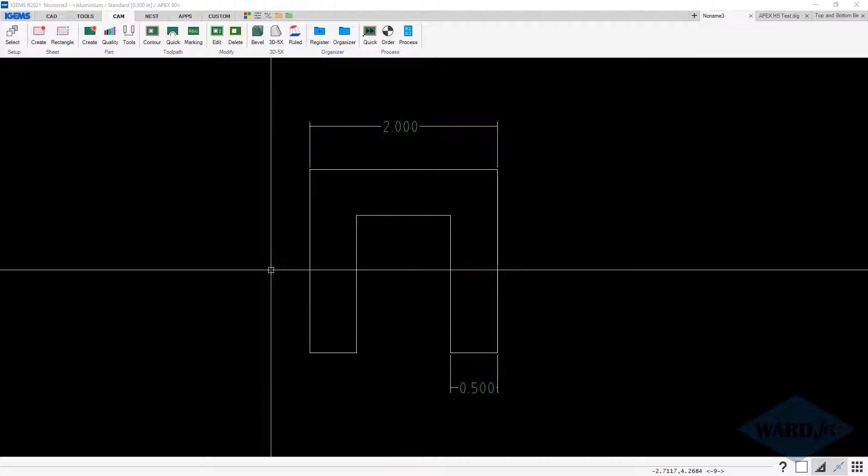In this video, I'll run through how to set up and use taper angle control and variable offset control in IGEMS 2021. Taper angle control can only be used if you have our Apex 60 5-axis head. The variable offset control can be used both with the Apex 60 head as well as 2D heads, since there's no moving of any A and C axes involved with the variable offset control.

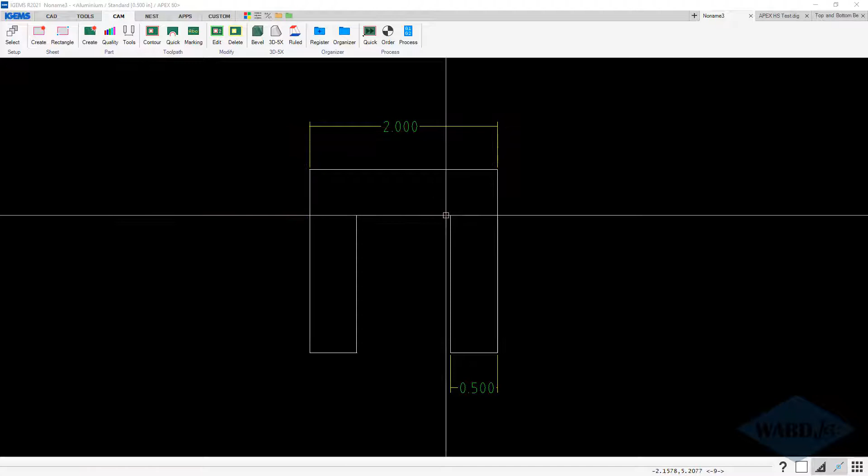The taper angle control helps to reduce the taper top to bottom on a part when you do waterjet cutting at different speeds. And then the variable offset control changes the tool offset as your speed changes. So once we create a toolpath around this part here, you'll see that when we're at a slow area and then as the speed increases, the offset will change.

And that's because as you cut slower with waterjet, your kerf width gets a little bit wider, and conversely, as you cut faster, it gets slightly narrower. And with the variable offset control, you're able to basically adjust or compensate for a bit of that change in your tool radius as you're cutting along there.

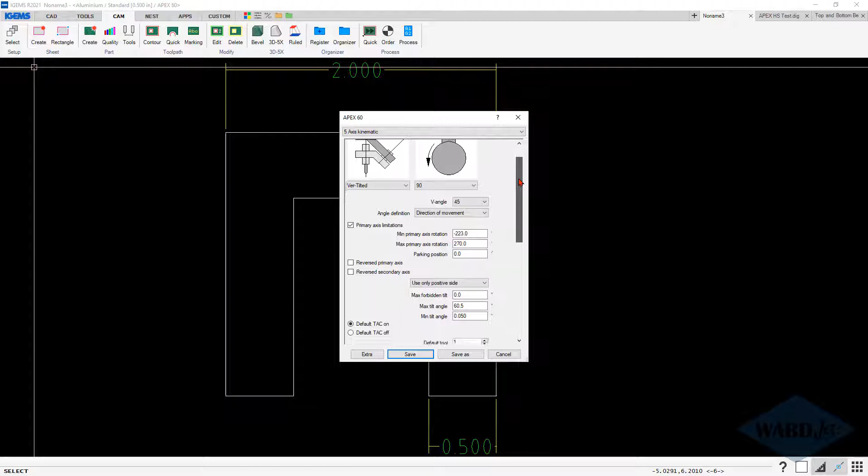So first of all, for the Apex 60 machine settings, if you click on the machine icon and you go down to the 5-axis kinematic area, if taper angle control is something that you're going to want to use all the time, which once you have the numbers in the material you might as well, you can come down about halfway and click this button here, default TAC on, and then the taper angle control can be applied to every part that you program.

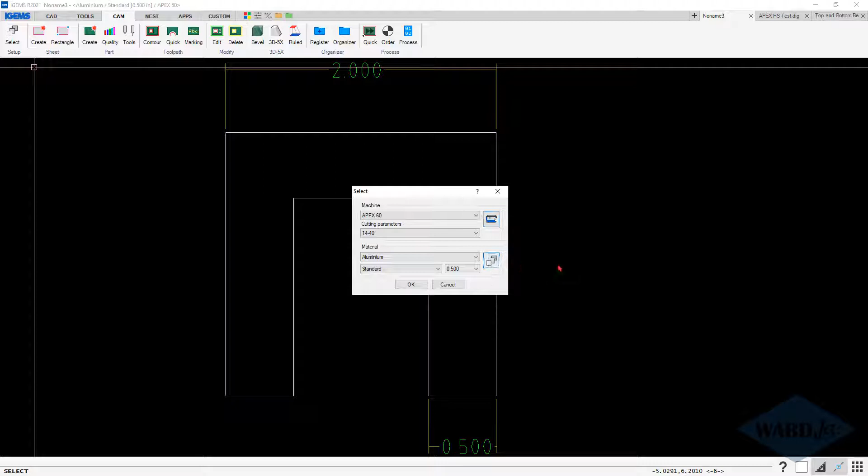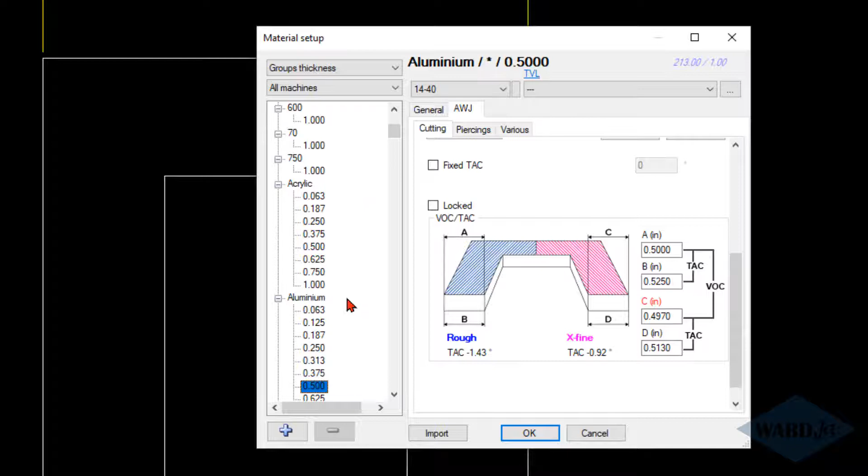And then we're going to look in this case at 1/2-inch aluminum. So here we can click on the edit material button. And you scroll down here a bit, you've got this box here for VOC, TAC. So we do have some numbers in here for many of the metals already, aluminum, stainless, mild steel, a few others. But if you've got a new thickness or material that's not already in the database, the basic idea would be to program a shape like they've got here.

And in the background, I've got one that's programmed basically 2 inches by 2 inches with 1/2-inch fingers. And you cut the left half at the rough speed, and you cut the right half at the extra fine speed, and then you take measurements A, B, C, and D.

So B minus A will give you the taper angle control number for the rough speed, and then D minus C is going to give us our taper angle control for extra fine speed, and between those two the numbers are interpolated. And then the other thing is the VOC, and basically what they'll do is subtract C from A. And so in this example here we had 1/2-inch at the top of the rough area, and we measured .497 at the top of the extra fine area.

So that's generally what you're going to see, 2, 3, maybe 4 thou difference between the two. Generally it's going to be probably 2 to 3. And then for the taper angle control, generally at the rough speed you're probably around 25 thou taper. At the extra fine speed you're probably somewhere around 15 or so. So if you're just thumb sucking some numbers and want to plug some things in, these would probably be a fairly decent starting point for the general range of 1/4 inch through 2 inch.

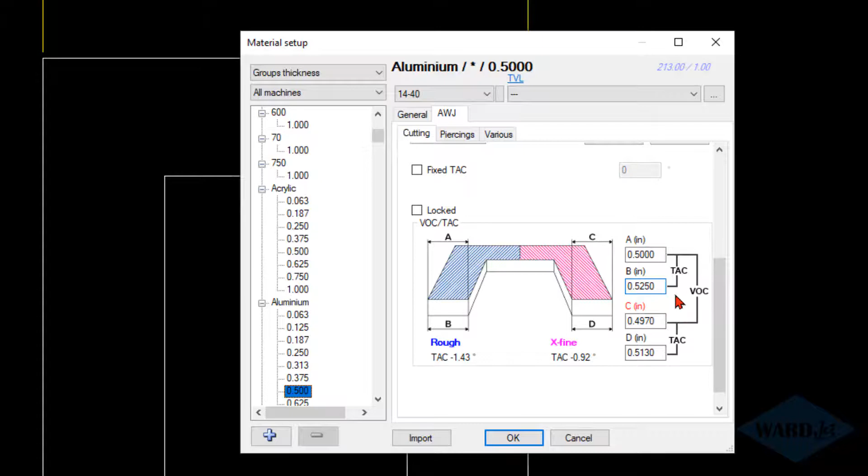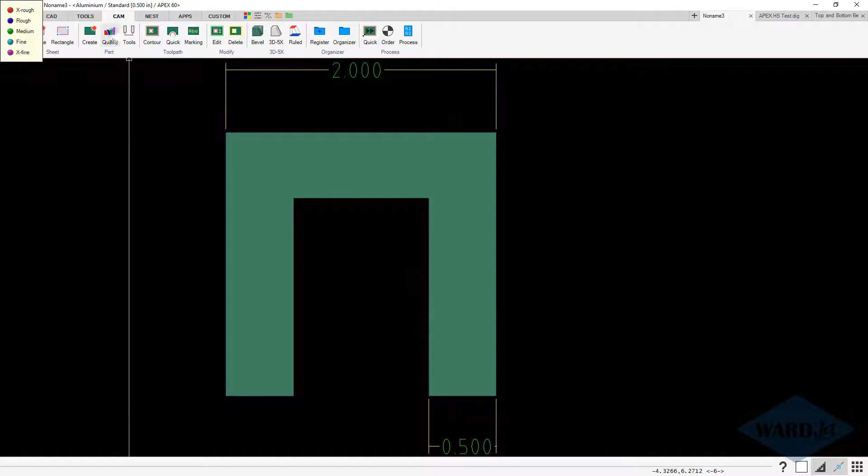Now what we'll do is go ahead and apply this. So I'll go ahead and create my part. And I won't create my toolpath right now. I'll go into my quality area and apply quality. So I'll do the rough, I'll generally start somewhere over here to the midpoint of here. And then I'll do the extra fine, we'll just go from here to here.

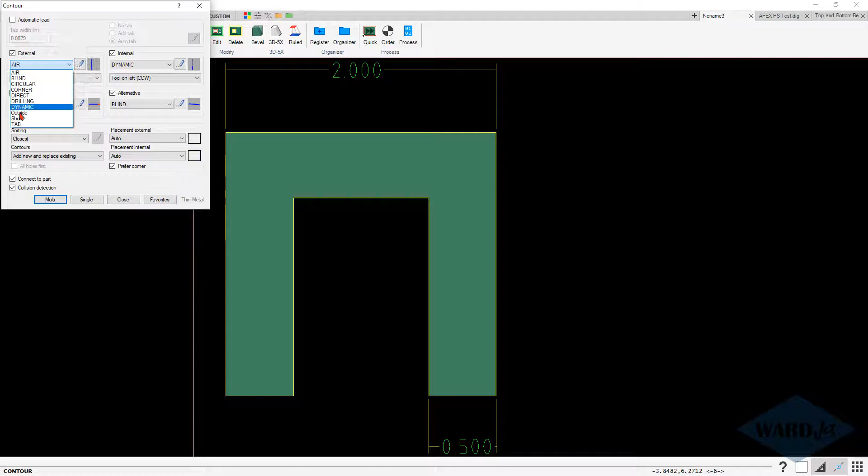And I'll put a toolpath on here. Let's switch to my metal. Usually you're going to want to have a tab on the outside so this doesn't fall into the tank. So we'll put that at the top middle here. And then I'll hit enter. So if I click on the quality, I've got my qualities on there.

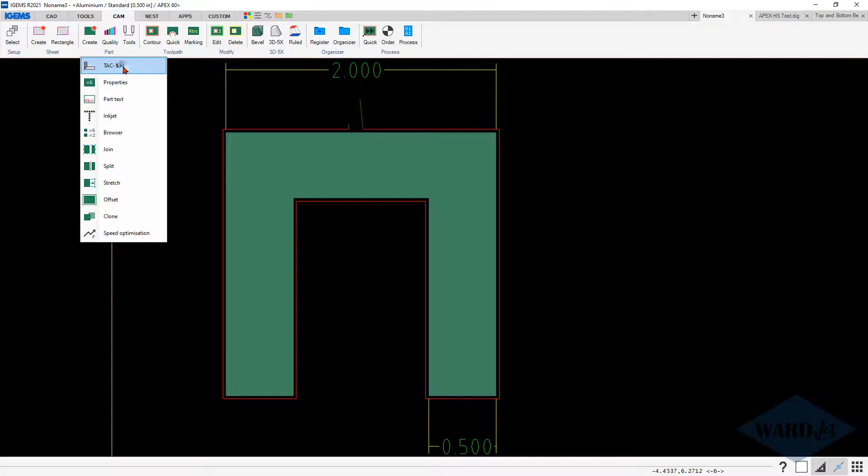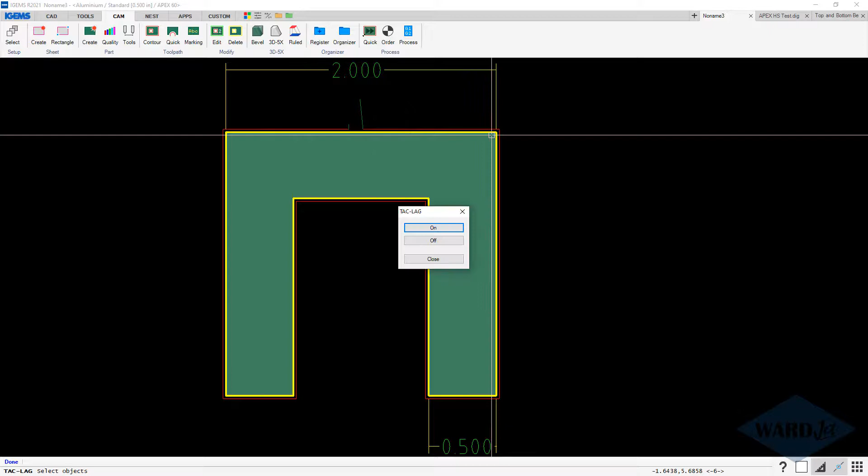And just as a side note, if you go into part and the TAC-LAG button here, since this is highlighted in yellow, that shows that the taper angle control will be applied to this. If you decide after you've applied the taper angle control you don't want it, you can just click on here and remove it, or if you want to put it on an older part that you hadn't applied it to, you can just click on there and turn it on. So then we'll just set our 0,0 point on here and create our file.

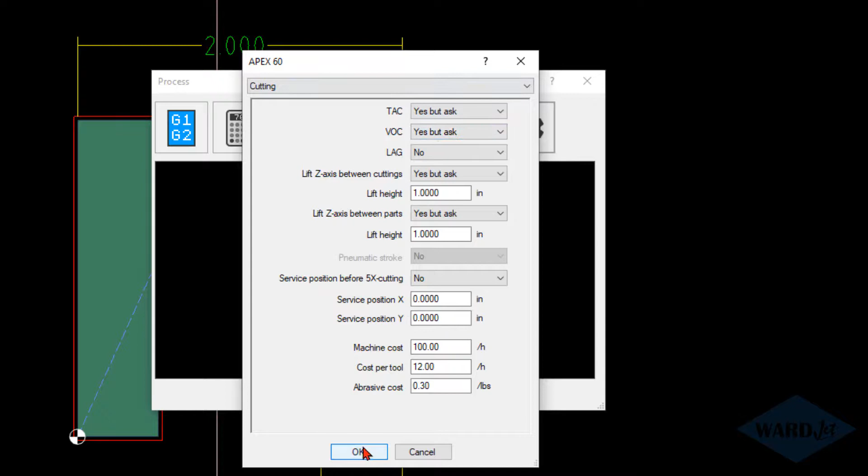If you go into the settings area and strategy and then go to the cutting area, you have these selections here for TAC and VOC, so you can set these to these 4 different options here, and same thing for VOC. And then when we do a preview here, you've got your buttons where you can decide if you do want to turn them off.

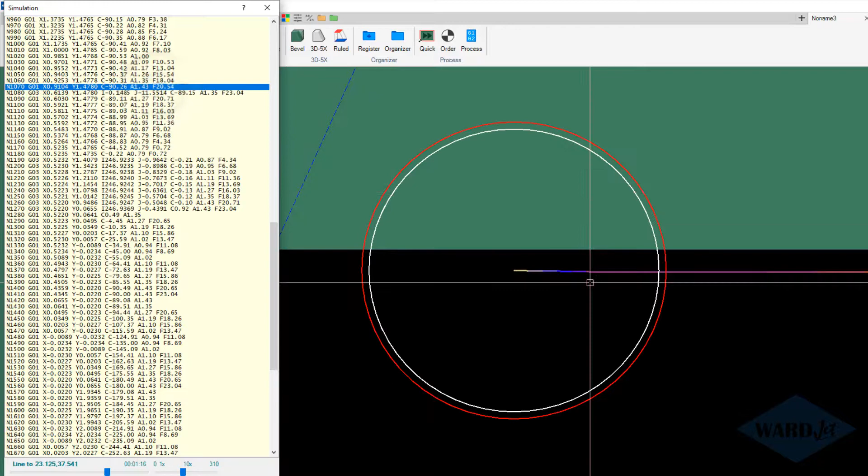And we'll zoom in on this when we get around the corner here. Back up a little bit here. So here we'll see as we go into that rough area, see how this toolpath here is moving in towards the part slightly, and that's the VOC coming into play. And then also, as we see here, we have our A and C numbers for our taper angle control.

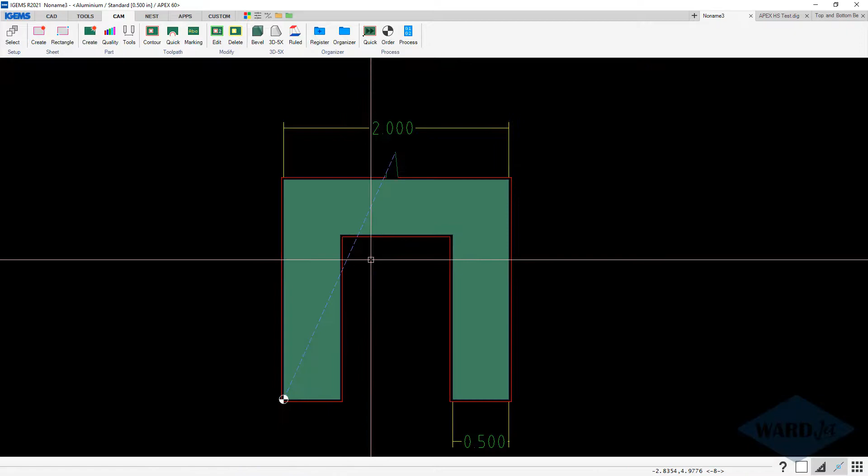So then if you cut a part like this, measure it, and find out maybe there's still a couple thou taper, you can go back into your material and just scroll down here and add a couple thou and try it again. But that's the basic idea.